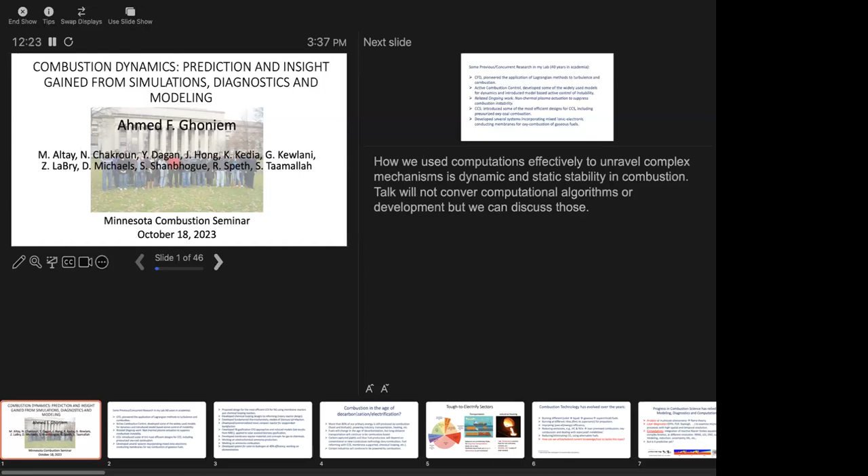I've also had the great fortune of being able to diversify my research into several areas during my career. So I still do combustion, both simulation and experimental work, but I've also worked extensively, especially in the early part of my career, on computational fluid dynamics. I was one of the first to introduce Lagrangian methods, particle-based methods, in CFD.

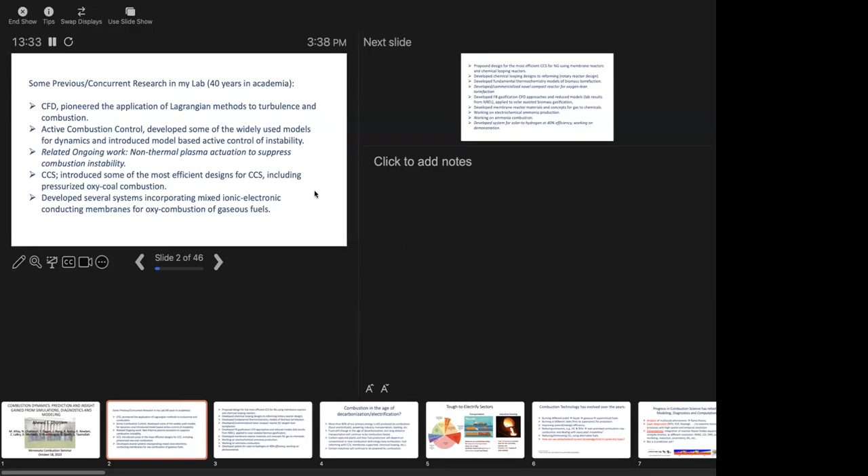More lately, I would say over the past 15 years or so, I became interested in diversifying my research into the energy area. I worked a lot on carbon capture technologies or carbon capture processes, where we used oxy-combustion, which is a kind of a natural extension to my research in combustion, but I also worked on areas of oxygen production, air separation, which is an important area in

oxy-combustion in general. We worked for a while on coal, actually using oxy-combustion, and we developed new methods for efficiently burning coal and oxygen. Fortunately, coal has not been very popular, so we gave that up. We also worked on newer technologies for oxy-combustion, like what's known as chemical looping technologies, where you use metal oxides to separate oxygen and burn fuels. Great, fantastic technology. We've made a lot of progress in it. Still considered a bit more expensive. It hasn't been applied commercially at scale, but I'm sure it will get there.

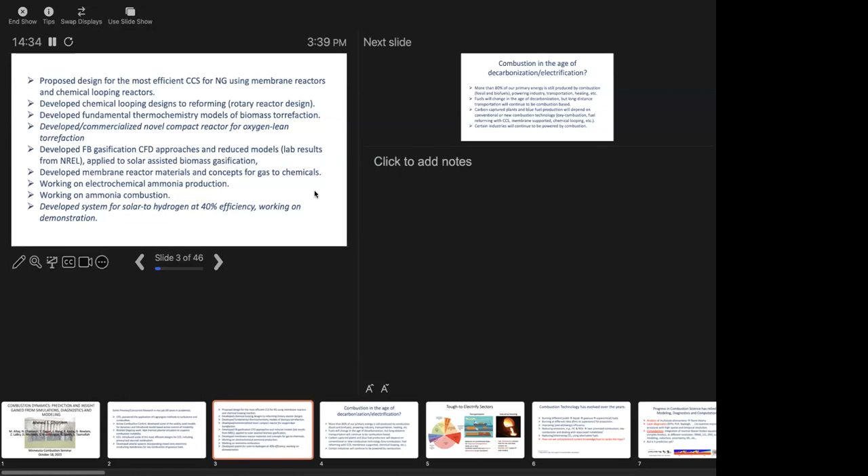More recently, I would say over the past 10 years, I also started looking at fuel production, both biofuels as well as hydrogen. And the combustion work continues, and the reason it continues is because I don't believe, and many thought leaders don't believe, that everything in our life will be electrified. So we still will need to burn fuels, whether we want to do long distance transportation, whether we want to do industry that needs high temperature like cement and steel, or we need to store energy. A great deal of storing electricity is in the form of fuels.

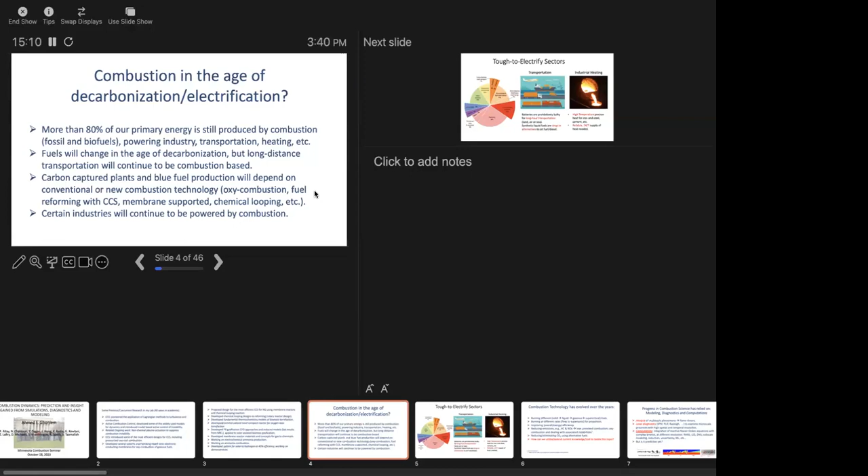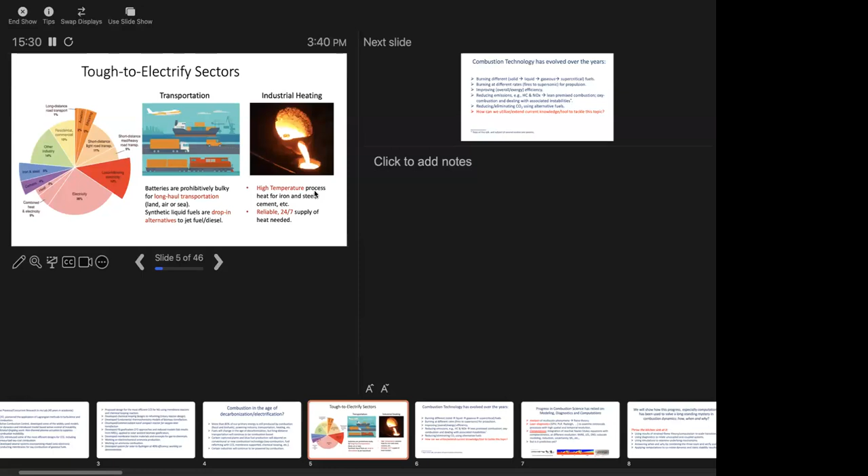So combustion technology is going to be around for many years to come. Maybe we will not burn the same fuels we burn today. Maybe we'll burn other fuels, hydrogen, ammonia, maybe other fuels will be invented, will be synthesized, but they will be very much part of our energy systems. And combustion technology has benefited greatly from combustion science. So those of you who are currently studying combustion can review combustion theory. It's a very highly developed, well synthesized and systematized body of knowledge that was developed over the years, largely by

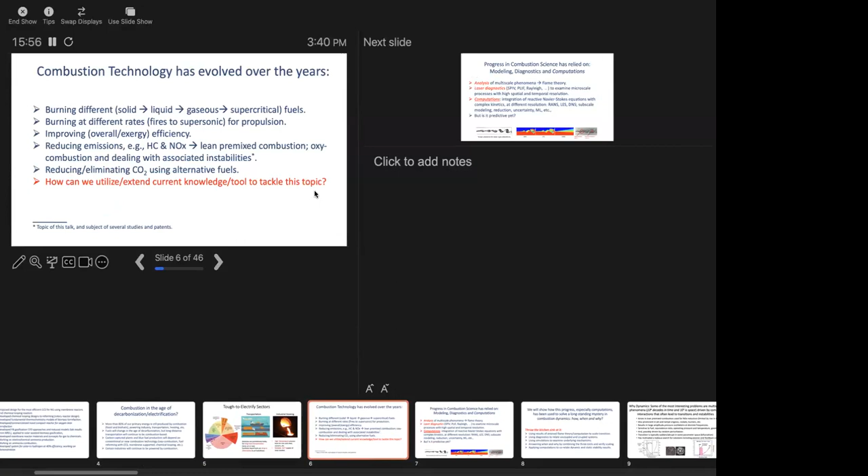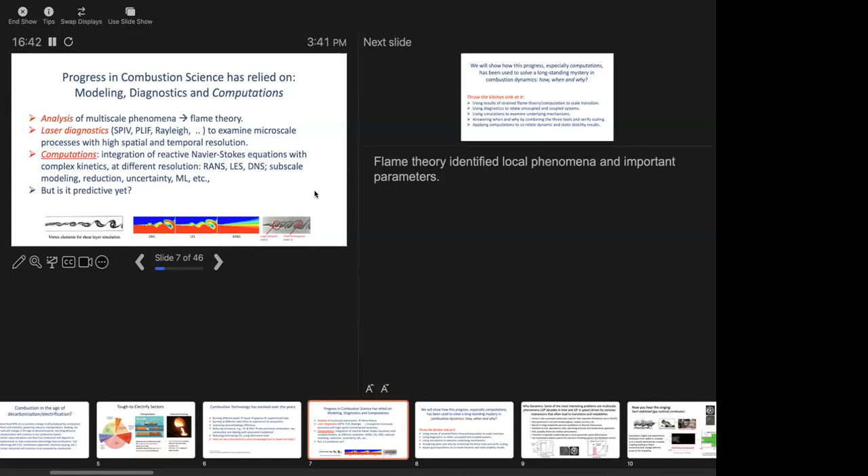taking advantage of three different approaches that we work with. One is theory, obviously developing theory for combustion science: analytical methods, asymptotic expansions, and so on. The other two that have revolutionized the field are diagnostics and computation. Being able to measure at the particle level very fast anything you want to measure, and being able to compute at many scales and with significant complexity in the physics you're computing,

has made it possible to really dig deep and learn more about what's going on in combustion. So in this day and age, when you study a technology, you do what I call throw the kitchen sink at it, right? Do analysis, do computation, do experiment, try to apply as many tools as you can to figure out complex puzzles, how things burn, how they convert chemical energy to thermal energy, what comes out of it at the tail end, has become the trend. And what I'd like to do today is take you through a journey in which we did that. And we did that in this particular problem of combustion dynamics that I will define in a second.

But by halfway through the talk, you will realize that it wasn't possible to do everything we wanted to do without having very good experiments, without having theory, and without applying very powerful numerical methods. Towards the end of the talk, hopefully you will hear how we're trying to use that understanding to control the problem that we have, which is combustion dynamics. So hopefully you will go through sort of a full cycle of defining a problem, trying to solve it, getting insight, and moving towards application.

So combustion dynamics is encountered constantly in continuous combustion systems. When you have a system burning, like a gas turbine system or like a continuous burner, you have the chance of the flames or the heat release zones activating an acoustic field. It's like you're blowing in an organ pipe, but instead of blowing, you're burning. So you're increasing the volume flow rate in the system.

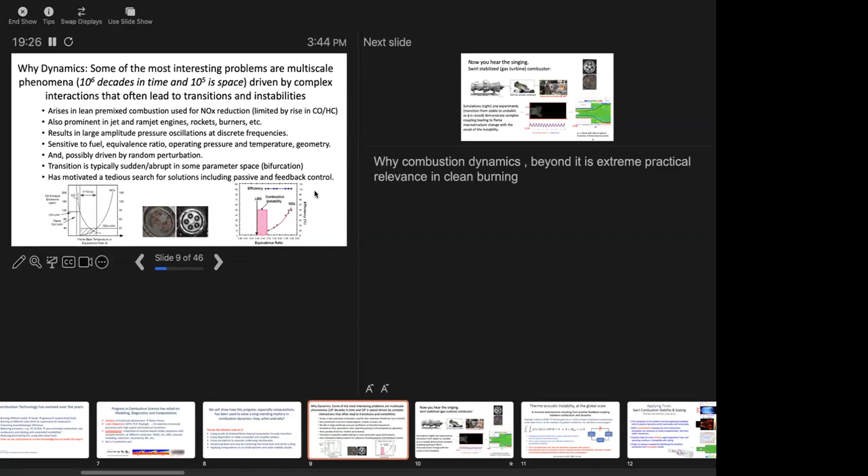And as I said, it's encountered in many applications, all the way from rockets to gas turbines to industrial burners. And it's been one of those outstanding problems that we always talk about when we talk about outstanding problems in combustion.

Believe it or not, the problem was defined in the 1800s by Lord Rayleigh, one of the grandfathers of acoustics, where he understood that if you have heat release zones embedded in acoustic fields, you can get resonance. And if you get resonance, the pressure oscillations will grow. And he came up with a mathematical representation of this problem: the pressure oscillations multiplied by the heat release oscillations. If the integral of that over space and time is positive, instability will grow.

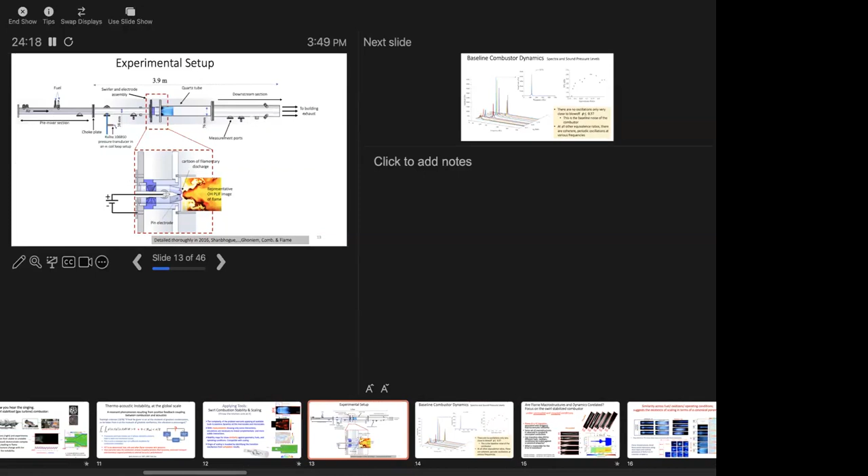And when we ran this experiment, we changed the equivalence ratio, the fuel concentration in the premixed gases. So our control parameter here was how much fuel we put into the system. As you know from your combustion basics, you can start with lean condition, low equivalence ratio, and you can go all the way up to stoichiometric condition.

And when we ran the experiment, like many others who work in this field, it's not only my group, at different equivalence ratios, and measured the pressure oscillation. So this is the RMS value of the pressure oscillation. At different equivalence ratios, we encounter in the beginning, at relatively lean condition, a relatively quiet, background-noise type situation, but at some equivalence ratio, the pressure oscillation jumped extensively. It became very large. You can look at it here.

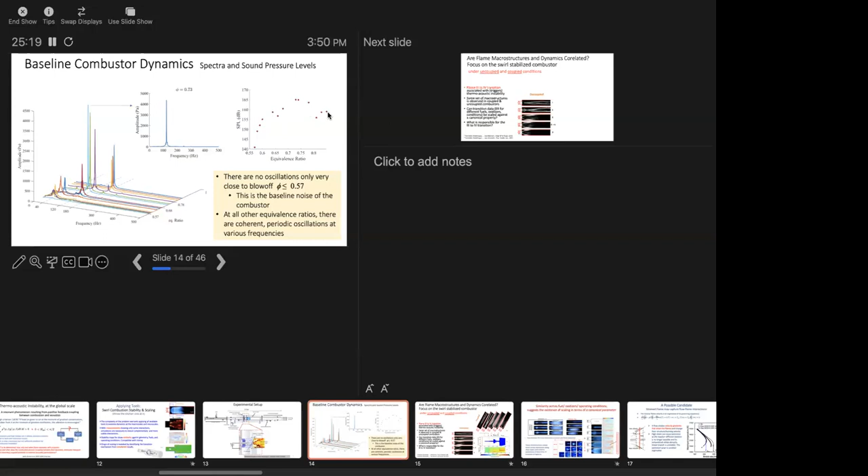This is a sound pressure level as a function of the equivalence ratio. At some point, it starts to grow significantly and kind of goes steady at these very high pressure oscillations. That's what we call unstable burning. That's when you start the flame puffing, going back and forth like you saw, and you hear very loud noise coming out of the combustor. So this combustor is unstable, as we wanted it to be, and we wanted to know why it's unstable and what makes it go unstable at these conditions.

So the first thing that you do when you encounter a problem like this is to start with what I call the base case. What is the base case? The base case can happen if you decouple the acoustics from the combustion field. So remember, the flame is sitting here, and when it starts to oscillate, it resonates with the acoustics, so the acoustics help it resonate more. How about removing the acoustic field?

How do you remove the acoustic field? We chop the combustor down to a much smaller length, so we don't allow resonance at the favorite acoustic frequency of the system. So we stop resonance from happening, and we look at the flame. And we started looking at these flames as we go from lean conditions up here to richer conditions.

At lean condition, the flame is very long, these very long V flames, because at lean condition the flame speed is very low. As we increase it, the flame starts to grow wider, more intense, wider, further. Here's the widest it can get, and then it switches from what we call a V flame, a flame opening like this, into a flame that's also stabilized near the wall.

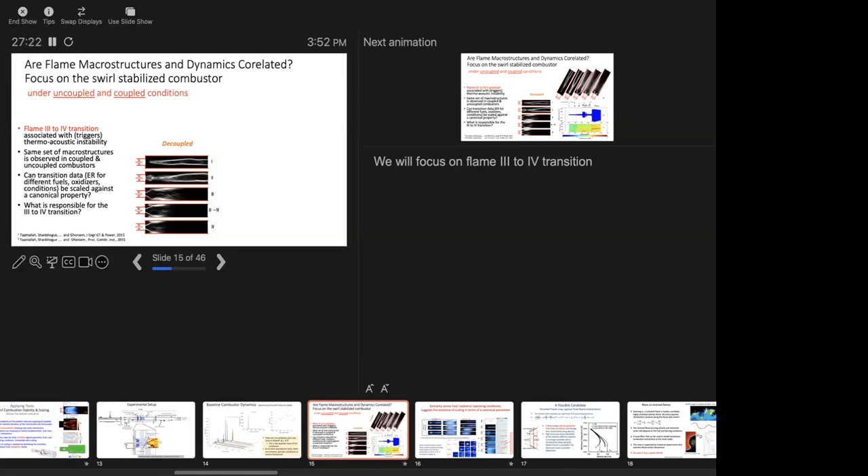When we coupled the system, we put in the acoustic pipe that's part of the original combustor again, and we ran the system. We saw very similar average flames coming up. So these are the coupled flames, and you can judge for yourself how much these look like these. But with acoustic coupling, the sound pressure level is very low. Here is the pressure oscillation.

Then all of a sudden the pressure oscillations start to jump, and we get this first instability. You get another quiet zone, then you get a second instability that's even worse.

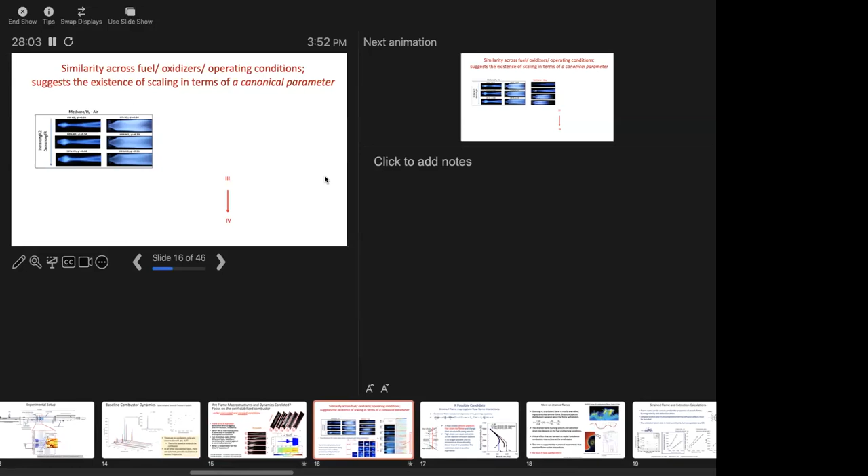On the other hand, oops, I don't know why I lost the slide.

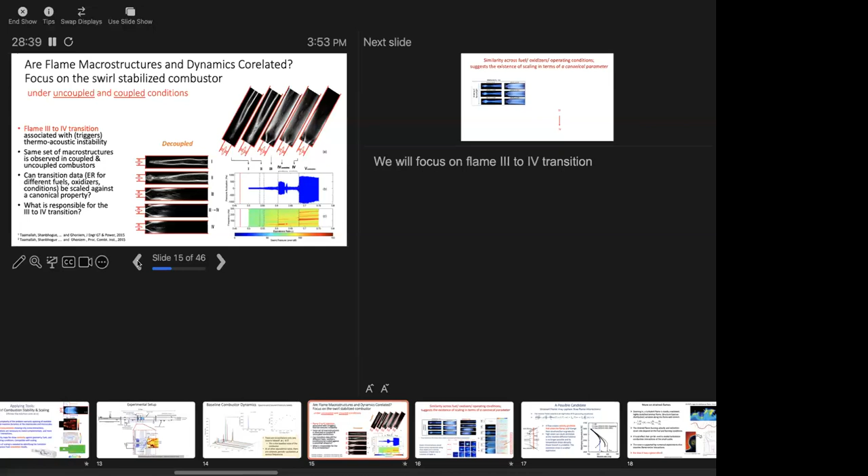On the other hand, this is a noisy combustor that's about to self-destruct. This is the quiet one, but this also allows acoustic coupling. The other one does not. What we concluded is that the base flow does not change when you couple it with the acoustic field, that the underlying flow, the underlying combustion process, did not change with the presence of acoustics. Something else happened, and the question became, what else happened?

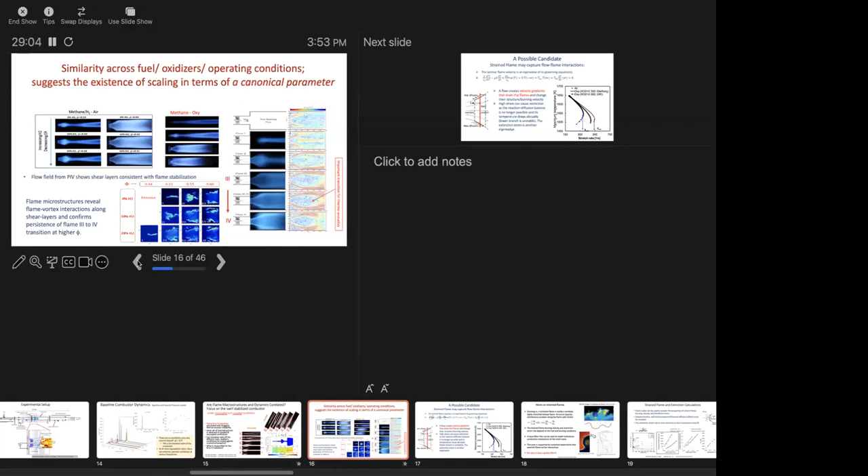Just to add a bit more fuel to the fire, no pun intended, we tried the setup with different fuels. For instance, we used hydrogen instead of methane. We used hydrogen and methane instead of pure methane. We tried syngas with different compositions. We tried oxygen as an oxidizer instead of air. And we would get the same transition, the same flame shapes.

Here are the flame shapes going from this long V lazy type to a much more active type. We get very similar PIVs, similar flow field on average, and similar instantaneous flame structures from the experiment. So these changes will always be there. Of course, they may be different. They may occur under different conditions when you change the fuel or the oxidizer.

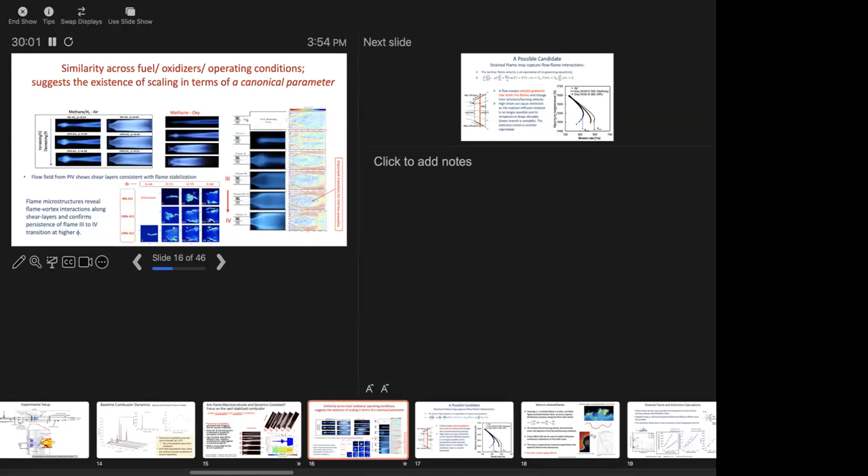You would expect that if you change the fuel or oxidizer, the condition at which you get into the unstable regime changes. But you get into the unstable regime once the flame looks a certain way. Once it goes from flame 3 to flame 4, you get unstable. So we started thinking, what is going on here that would make the flame, when it couples, go unstable? And we started digging into the theory a bit.

One major model for turbulence interactions with flames is known as the strained flame configuration. So flames normally propagate on their own. If you add turbulence to them, turbulence will start to tear them up and stretch them and curve them and do all kinds of things to them. Fundamentally, the most important interaction is embedded in what's called a strained flame. A strained flame is a flame subjected to a positive velocity gradient along its own structure. So you take a flame and the flow starts to pull it in its own direction.

Once it starts to do this, it's impacting the balance between transport and chemistry. Because once you pull on it, the transport fluxes change. And when transport fluxes change, the transport rate changes, and you may get into a situation where the transport flux, or transport time scale, is no longer accepted by chemistry, because chemistry has its own time scale. If you stretch a flame too much, you extinguish it, you kill it.

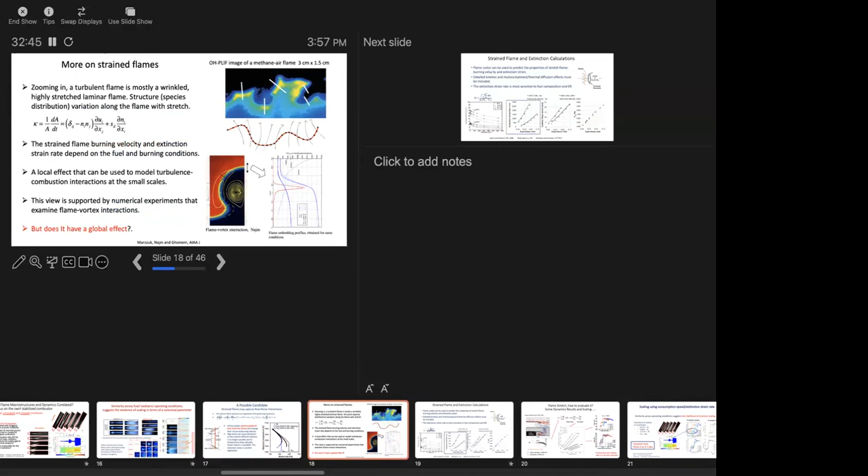And the reason why we thought that theory should play a role here is because what we find is at some point this change in the flame configuration or flame structure is associated with burning being possible in areas where it wasn't possible before. So you push the flame into areas, it becomes much more compact, much stronger where it shouldn't have been. The only way that can happen is if the flame gets too strong and it's no longer being extinguished in these areas. That was kind of the inspiration for thinking about the theory.

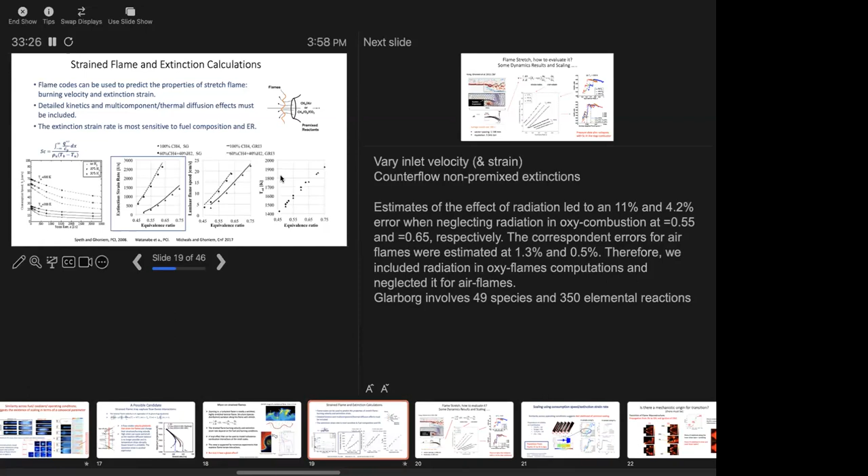And we wanted to set out to see whether this theory makes sense or not: that the extinction of flames in certain areas of the flow is the reason why under some conditions you get instability or coupling, and under other conditions you don't. We did it in two different setups. I'm not going to talk about this setup for too long, but that was the first setup we did it on because it's a planar, what's known as step-stabilized combustor. It's a bit easier to measure in it.

It's a bit easier to get the velocity field from which you can get the strain rate, which is defined here in terms of velocity gradient. And indeed, it did show that it's possible to use the strain rate to identify the point where that transition from stable to unstable conditions occurs. So the strain rate is a property of the mixture, only a property of the mixture, as well as the operating condition, of course, the temperature and pressure.

So if we can use that property across all the fuels we used and across all the oxidizer streams we used, to actually scale the data from different fuels and from different oxidizers, such that all the characteristic curves that we used to get individually can almost collapse on the same line as a function of a strain parameter. This is shown much better.

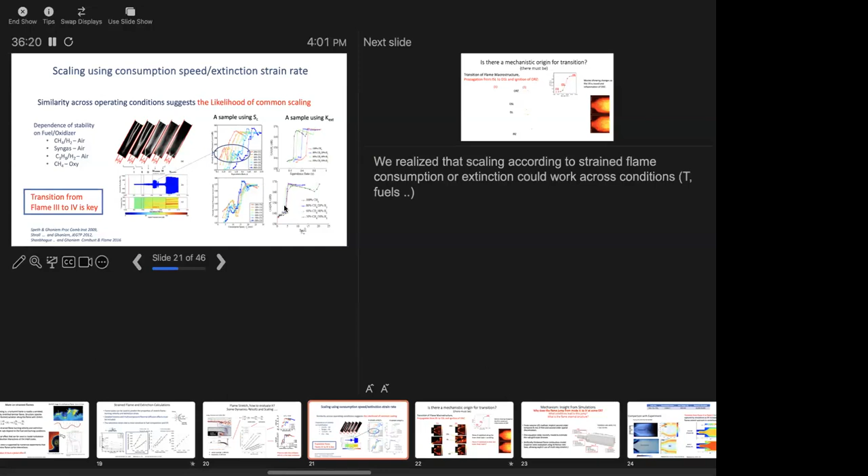Potentially, this one curve not only will apply for these fuels, but will apply for other fuels, because the extinction strain rate doesn't really care about the fuel. It's a function of the fuel, but once you get that function right, the rest of it doesn't matter. So that was our first, if you like, breakthrough in this thing. The second one was exactly the question that I was trying to answer before. Why does the strain rate play a role?

Well, here is the flame being visualized by two cameras. This is an axisymmetric flow, so we have two cameras looking from the top and the side and showing what I would first call flame 3, the V flame, very intense. Then after a while, you see the outside catching fire. So here's the V flame. After a while, you see, boom, the outside catches fire. When the outside catches fire, the instability kicks in. So this has very much to do with enabling this flame to propagate into this area, which initially could not support this combustion.

These are the same thing, but still and under unsteady conditions. So this is our V flame, and this is our basic M flame, when we're not only burning in the inside shear layer, but we're also burning on the outside shear layer, providing that intensity of burning and providing the support for the instability.

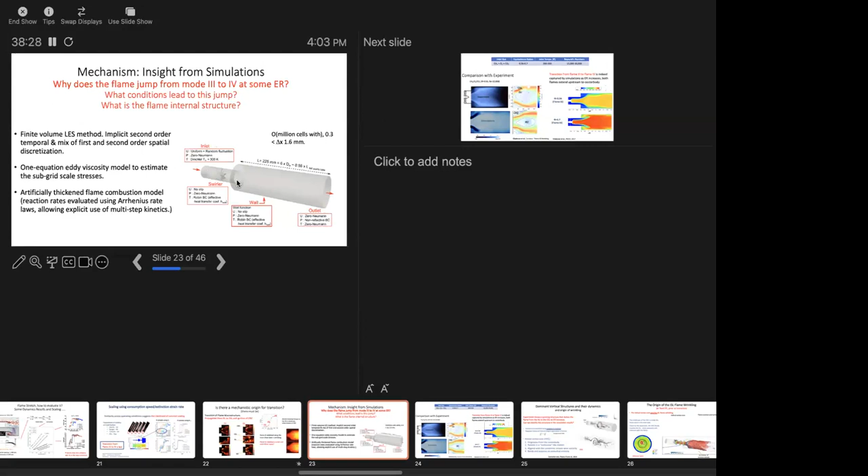And we started running a code like this. The first thing you want to see is that you get the overall features and you get this transition. And the answer was yes, that we're able to see, under some similar condition, what the experiment shows and what the simulation shows. Also, as we started increasing the equivalence ratio of fuel, the flame switched from that V shape into that M shape, or from flame 3 to flame 4.

So that gave us confidence. All simulations have simplifications in them, so you need to check, before you're comfortable with the interpretation of the data, that you're at least getting the basic features right. This showed us that indeed we can get the basic features right, that with increasing the equivalence ratio, we can get the switch from one flame to another.

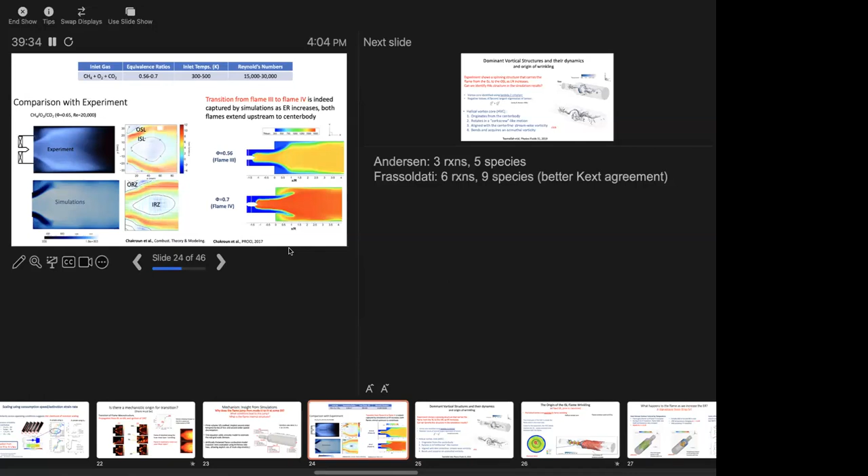So I said, all right, well, let's look further. Let's look whether we can learn a bit more from the dynamics of that flow. Why would the flame want to jump from one location to another? So this is the underlying major vortical structure. It's a corkscrew vortex that starts at the swirling zone and forms what looks like a corkscrew.

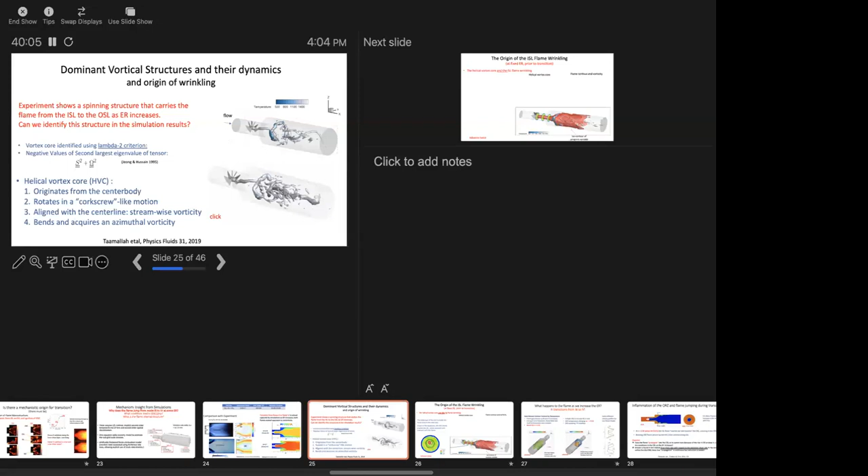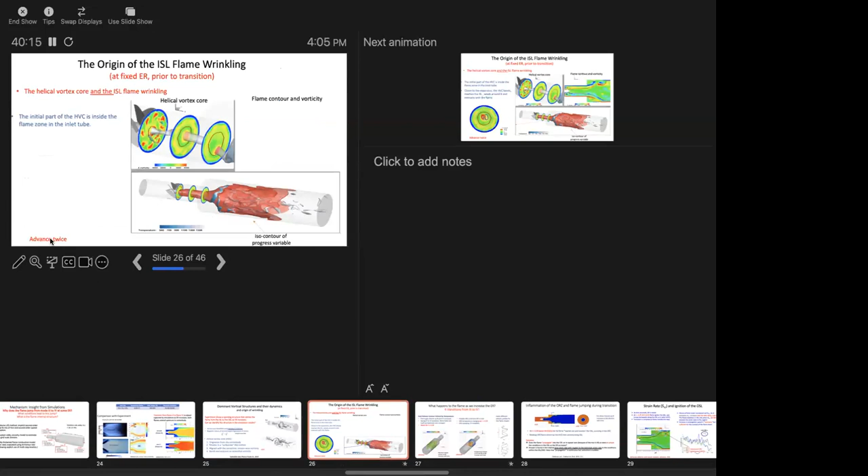And this is the vortex that takes that flame and spins it around. When you see these holes in the experiment, there's the impact of the penetration of that vortex. So here, for the fun of it, there's a whole bunch of movies. If I do it correctly, you'll be able to see them. If not, yes, here we go.

So this is the flame front visualized by a particular temperature. And these are the swirl vanes. The flame is actually stabilized on the aerodynamic body here. And here we're just showing sections to capture the vorticity field. Look at this corkscrew vortical spins. And here the same thing showing the cross-section of that vortex and how it's interacting with the flame.

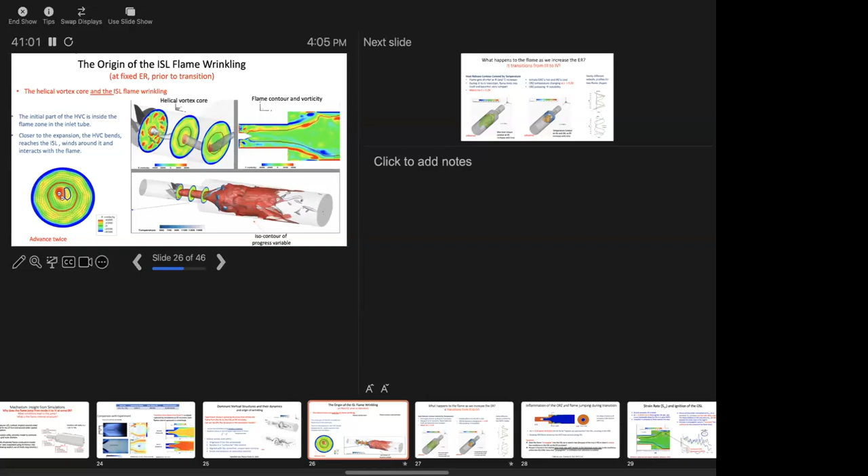So, okay, there's a very important strong vorticity field with associated strains and so on that's governing the stabilization of the flame. Now, here is another representation of the same movie. This takes a bit of careful watching, so please pay attention. The calculation will show you the transition of the flame from 3 to 4. So I'm going to advance so that we can watch it.

And the first one shows one representation, which is a maximum heat release kind of representation of flame. The second one shows the temperature contours. So the temperature contours here, the flame was hot, that is the V flame, and the outside zone was cold. And now we're increasing the equivalence ratio gradually. And as you hit a certain point, outside area got inflamed.

And now we're burning inside and outside. And the maximum heat release zone folded. This is, believe it or not, the fold that stabilizes inside, goes out, and stabilizes outside. So it literally is two flames folded on each other. So what this is showing is, again, how the simulations are capturing this idea of the flame propagating from the inside out.

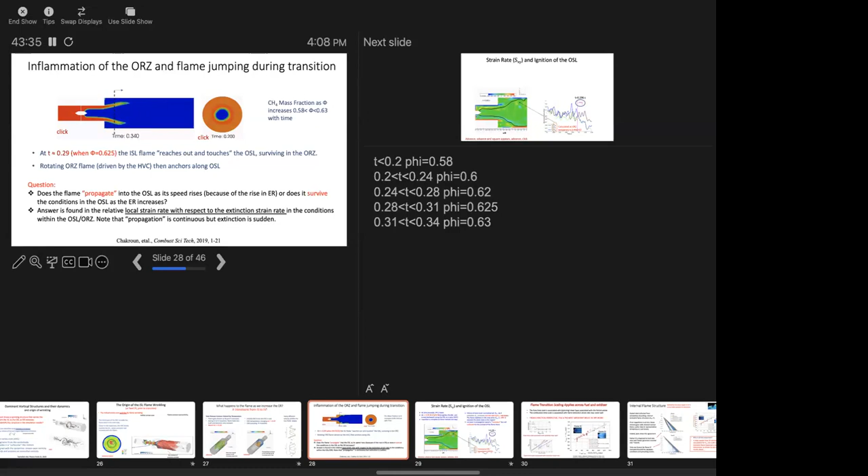And that fold, the formation of that fold and the stabilization of that burning zone outside is what we hypothesized is the demarcation of stable versus unstable flame. Going from one type of flame to another, from quiet operation into dangerous operation. So it's very, very important to see exactly what's happening here. So we started looking at the numerical data. And again, this starts as a movie.

Okay, so that is a flame surface. That's just one line, maximum heat release line. That's advancing. Now, from all what we've seen so far, the flame will fold around here to come back and stabilize itself on this point, so we get two flames. So we started taking measurements of the dominant strain rate at that point. Remember, we defined the strain rate as what's determining the interaction between the flow and the flame.

And we wanted to know whether the dominant strain divided by the extinction strain rate in this zone changes its character or not as we advance the flow. So the answer is here. You will see all of them coming down. So the dominant strain divided by the extinction strain rate is coming down, which means that the extinction rate is going up. Makes sense, because we're adding more fuel, the flame is stronger. So as the flame gets stronger, it's able to overcome the strain rates here that would extinguish it.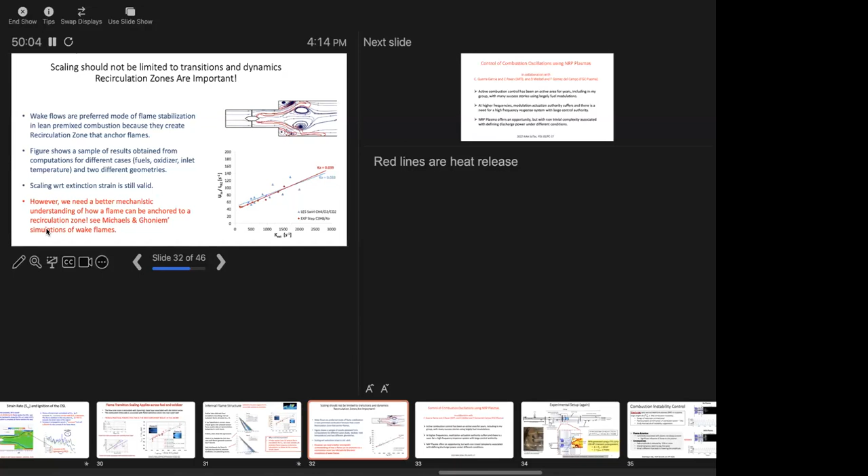For instance, we always talk about the size of recirculation zones forming downstream of swirl systems. And the size of the recirculation zone is important because that's what holds the combustion stable. We showed that, again, within a reasonably wide range of conditions, we can scale the size of the recirculation zone to the extinction strain rate of these flows, also on a straight line like this.

I'll spend about 10 more minutes maximum in showing our next venture. So the venture so far has been understand combustion dynamics, understand the source of combustion dynamics, define the mechanism responsible for it, define conditions under which it works or not, try to come up with some scaling argument for how you can use data from one experiment to help the other.

I should stop and say that the scaling is not only useful for operating within the range of conditions that we use. Of course, you have to always validate the statement, but I would argue that if you change the fuel into a radically different fuel, for instance, switching from hydrocarbon to hydrogen or hydrocarbon to ammonia, hopefully the scaling will persist. We haven't done this experiment yet. That's still under consideration. But that's one of the things that we're hoping to do, be able to carry over all the knowledge that we developed for hydrocarbon flames into other types of flames without having to redo everything. That's obviously a pain.

What we're trying to do here and now, and in these next few slides, is figure out whether we can control the instability. We know that the combustor will go unstable, right? Unfortunately, because it self-destructs if you go unstable, or you have to stop the operation.

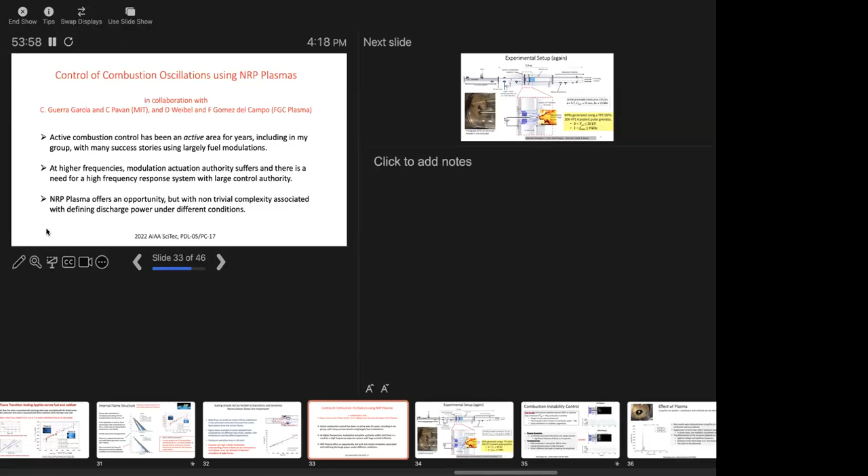The recent trend has been to try to use plasma, in particular nano-pulsed plasma, NRP, nano-pulsed repetitive plasma that can fire electric fields at very high frequency. We're talking about frequencies in kilohertz. So if you have an electric field that you can fire, the electric field is very strong, 20 kilovolts. 10 kilovolts works also sometimes; it depends on the condition. But if you're firing an electric field with this voltage at these frequencies, then you have very high frequency in the field. You have very high temporal authority on the field.

What we don't know is whether the electric field can affect the flame. Well, we know the electric field can affect flames because it ionizes the gas and changes the chemistry. So we knew that well. This is work in progress, it's not finished; I just wanted to give you up-to-date information. We knew it can, but can it affect it in this environment where we have these dynamics and instabilities and complex interaction?

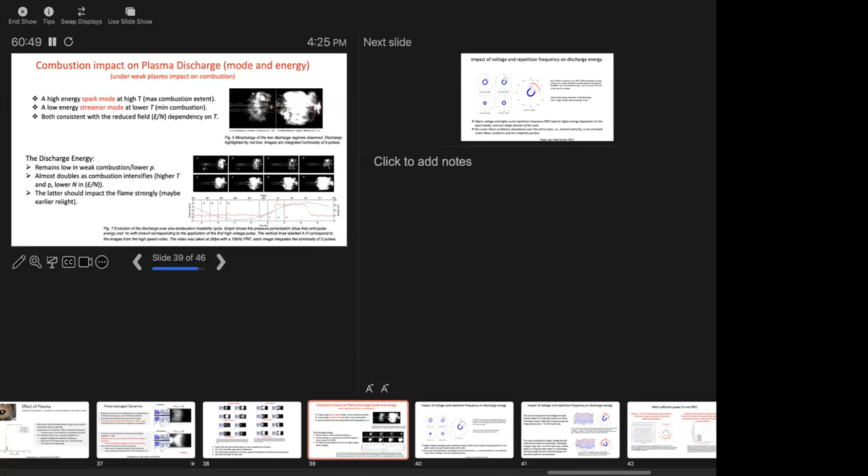Again, when you look at the plasma energy deposited in the field as a function of the pressure, you find that the plasma energy is somewhat consistent with the pressure oscillation. So the plasma is definitely impacted by the state of the gas. We ran different plasma conditions, different volt and different frequency. Remember, these are the two parameters we can control: how much volt you put in and the repetitive frequency.

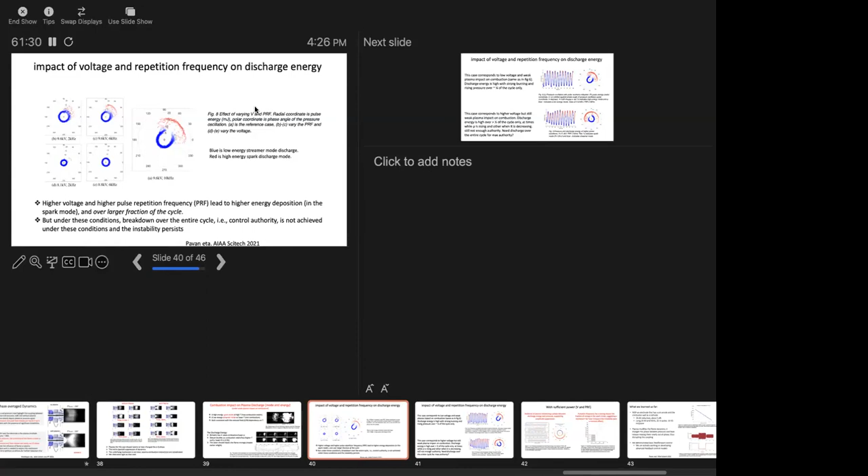We found that as you increase the volt, the energy associated with the plasma, the red, which is the spark mode, the energetic mode, increases. And with the frequency, the duration of it in the cycle, this is a 360-degree cycle, increases. So with stronger plasma, with higher voltage, and with higher repetitive frequency, you get more interaction because you get more energy deposited in the field.

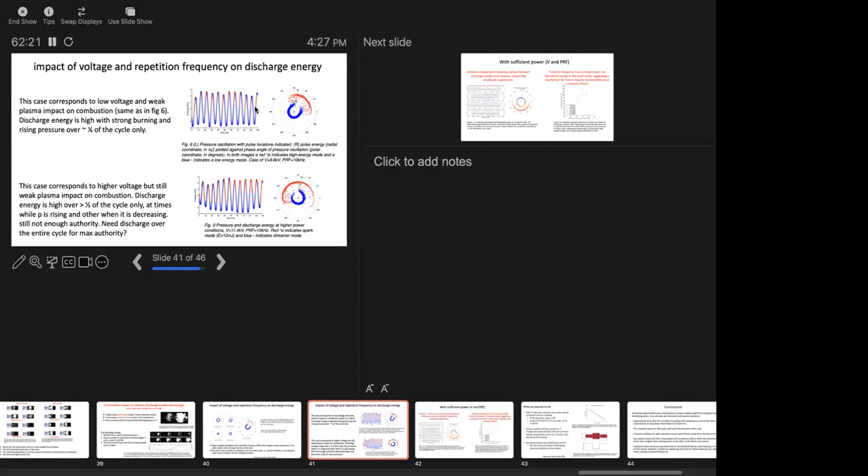The discharge depends on the field. It's unfortunate, actually, because it kind of limits our authority a bit until we understand exactly how that interaction happens, but it is part of the nature of it. Also, as you change condition, remember we're discharging, boom, boom, boom, but the fluid is responding, and sometimes the fluid responds when the pressure is rising, sometimes when the pressure is dropping. Sometimes it's only consistent, like in this case, only when rising, and here it's when rising and dropping. That also depends on the field.

Ultimately, what we found is that we need to have a strong enough field that you get large discharge deposition in most of the 360 degrees of the instability cycle, and you need to have it such that the discharge is strongest anti-phase with the pressure. These are the conditions that will lead to killing the instability. Exactly why is under investigation.

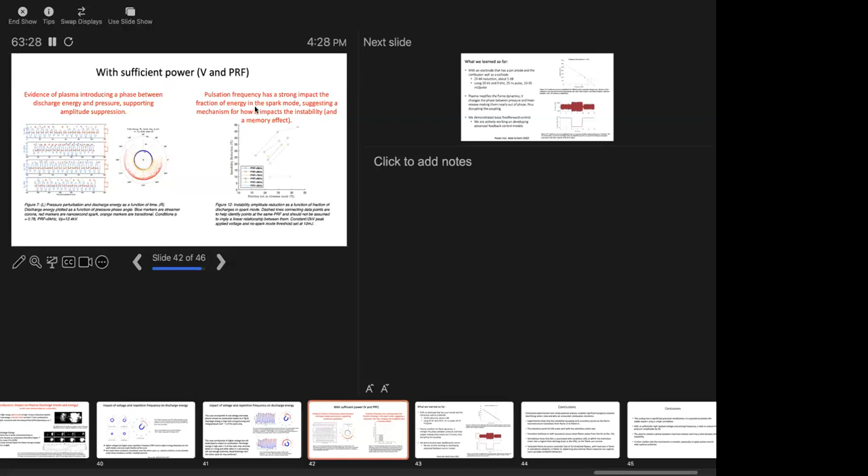Here is the change in the instability reduction with the fraction of the discharge in the spark mode, not in streamer mode. So the more sparking you get in your flow, the higher the instability suppression. So we're accumulating these bits and pieces of mechanistic information about what was going on in order to see how we can hopefully optimize the discharge to get the maximum authority of control.

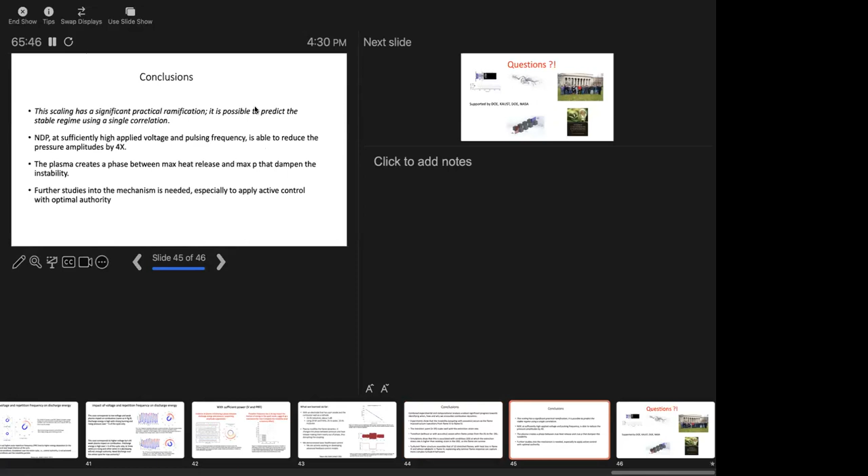Hopefully, the practical implication is that we can create one performance map for the combustor that divides its domain of operation into two, stable and unstable, as a function of the extinction strain rate and/or time scale, extinction time scale, and the flow time scale.

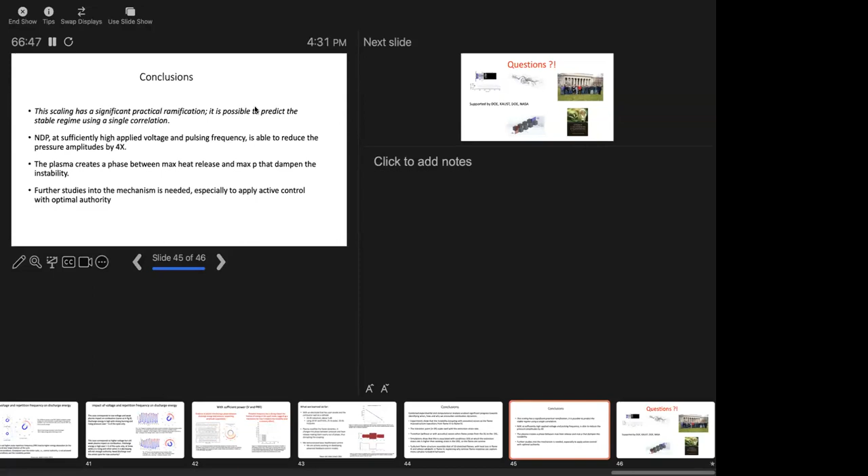Finally, coverage of plasma. This is still work in progress, so it's not final. We think plasma does have the chance of acting as an actuator to suppress the instability. It does, with the right authority, suppress the pressure oscillation, but we still need much more study to understand mechanistically what's going on in order to do the actuation more smartly, so to speak, to both minimize the energy for actuation and maximize the gain.

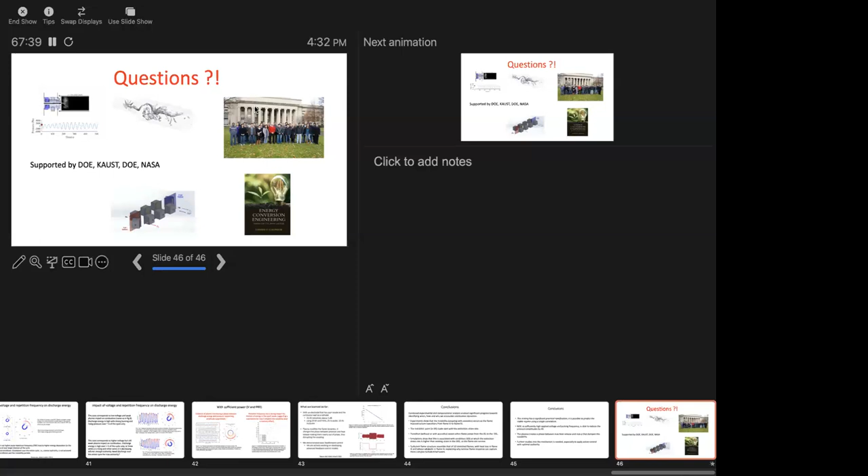Leave some time for students too, but would you mind going back to the beautiful linear correlation that you had with the time scales? I had just a couple of questions about that. This one, the most significant result here. So the question is, on the x-axis, is that the outer diameter? That's the diameter of the sudden expansion cross section. Of the sudden expansion, the diameter coming in. So does the relative diameter between where the swirl comes out and the big diameter matter? Is there a ratio that's important there?

It does matter. Just not to be a used car salesman, this has to be produced for every combustor configuration. So this depends on the combustor configuration. If I make it wider, the heat loss at the wall will change. The heat loss at the wall, where the flames start to lick that wall, affects the extinction strain rate at that point. That affects the local temperature at that point. So my selling point is this applies to a single configuration across fuels and across operating conditions.

With a single swirl ratio as well? No, actually, the swirl ratio is embedded in the... Oh, there it is. Sorry, it's right there. Yeah, it's embedded here. All right, one more question: when does the transition from flame 3 to 4 lead to extinction as opposed to instability? Oh no, in this domain it never leads to extinction. Never. The extinction here is the difference between flames burning out here and not burning out here. So the extinction happens as I move this way.

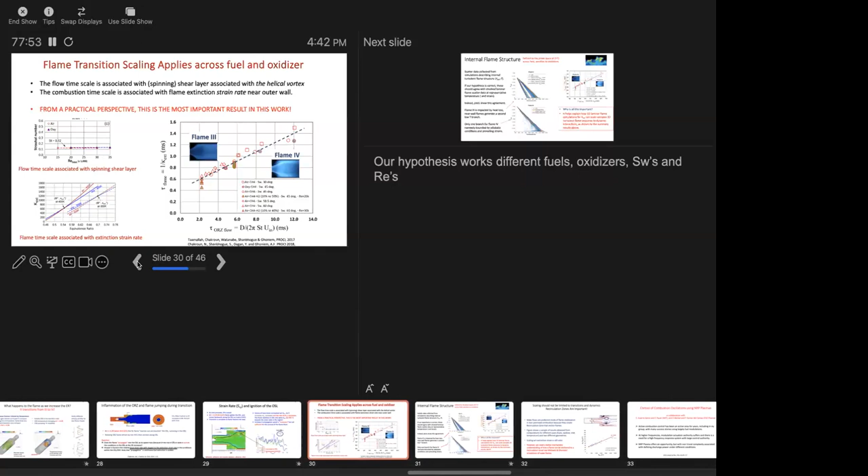Why it doesn't respond. Oh, maybe I do this. Okay. Aha, here it is. So you see, if you focus on it, see the fire? Yeah, but periodically like that. Yeah, it's periodic because it's spinning, right? So it spins in and out, that helical corkscrew vortex. It must drain and then fill.

Exactly. That's another way of thinking about it. It fills with reactants, burns, and ejects. That's why on average you see a bit of a faint color here, but instantaneously it does that. And here too, this is an instantaneous picture. Here is the boundary of the flame, and it extends all the way. And the hot gases are then able to escape without putting the flame out.

Right, exactly. Remember the corkscrew? The corkscrew is literally taking things in and moving forward. So it's sweeping and moving forward. That's the nature of that corkscrew. So instantaneously you will see the outer zone filled, but then the flow is pushing forward. So it takes that gas out, and the fresh mixture behind it refills it. Thank you.